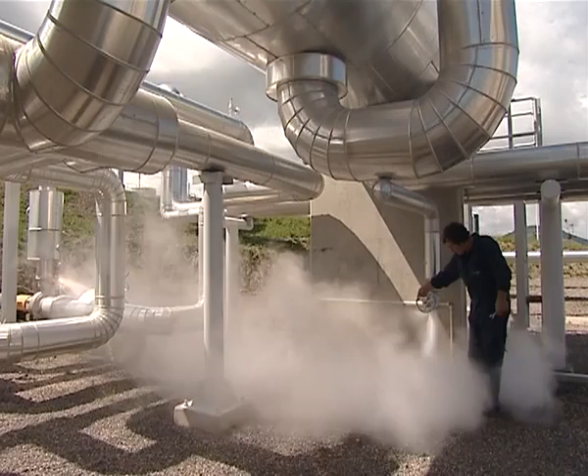This is well CL1, our deepest well with a maximum depth of over 2,000 meters. We collect water and steam from the 5 production wells we have at the Ribeira Grande power plant. The steam at the surface has a temperature of around 155 degrees centigrade, and from the different geothermal production wells, like this one, it is taken to the power plant to produce electricity.

The volcanic nature of the Azores archipelago has created a perfect natural energy reservoir. It sometimes manifests itself on the surface, to the great joy of tourists who can enjoy bathing in hot springs.

The Azores are located in a very particular situation. We are in a triple junction point, which means that three different tectonic plates meet here: the African, the Eurasian, and the American plate. This is the main reason why we have seismic and volcanic activity here, and also why we can find fumaroles and other thermal manifestations of this very high geothermal gradient.

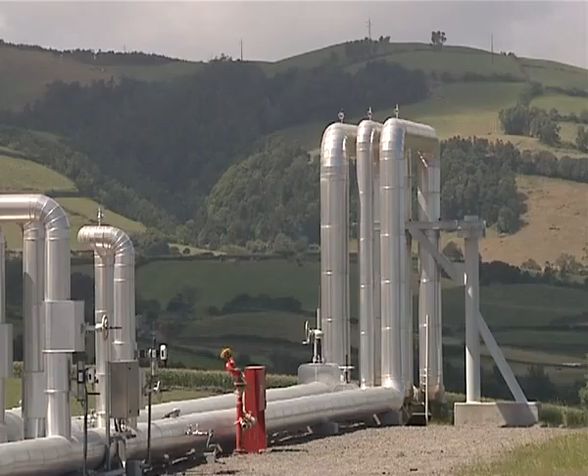As a result, we can see strange pipes in the countryside transporting this natural energy to the geothermal power station. For the Azores, this source of energy represents a truly strategic operation.

The Azores has a great dependence on using oil products. Having this in mind, there was a big need and a strong effort and commitment to develop renewable energies which could be available in the Azores.

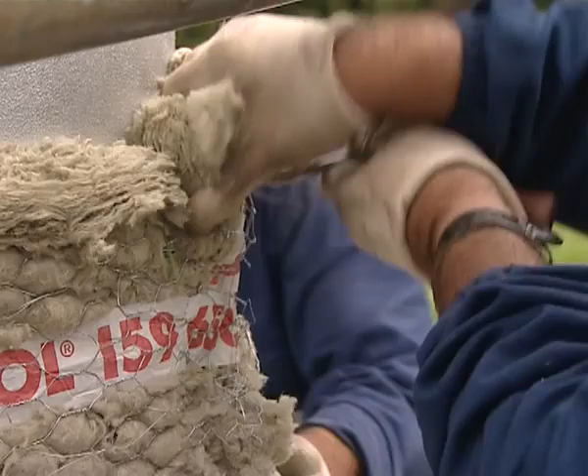In 1980, an experimental power station was successfully built. Thanks to the co-financing of the European Regional Development Fund, the first operational power station was put into use in 1994.

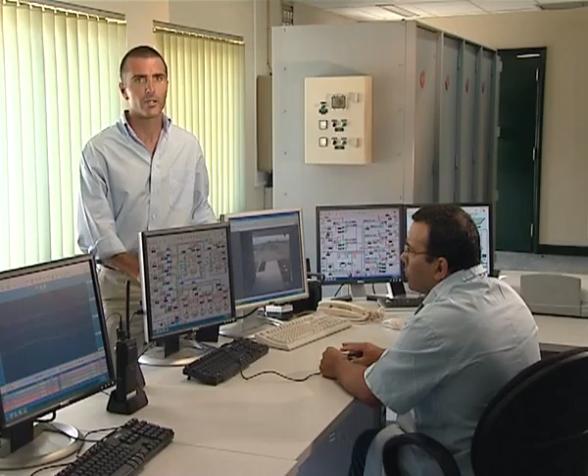We are now at the control room of Ribeira Grande plant. Here we started in 1994, so we have a long history of success using geothermal energy in this plant.

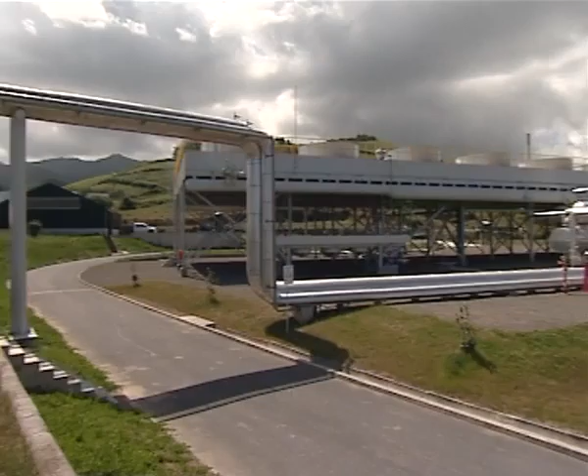This is the reason why we recently started a new project, a new power plant in Pico Vermelho, just 3 kilometers from here. In all, 60 million euros were invested in this project, with 25 million euros financed by the European Union.

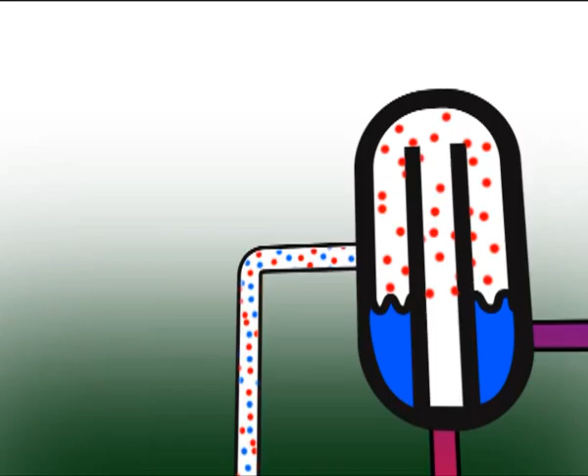The hot water and steam from various wells arrive at the power station by way of a collector. The water is separated from the steam. The heat is then transmitted to a fluid which is used to rotate a turbine. To do this, the fluid is heated by a hot water conduit before reaching its maximum temperature and then vaporizes when it comes into contact with steam.

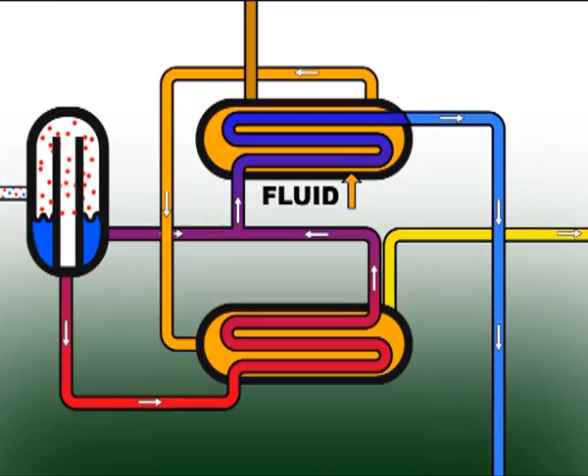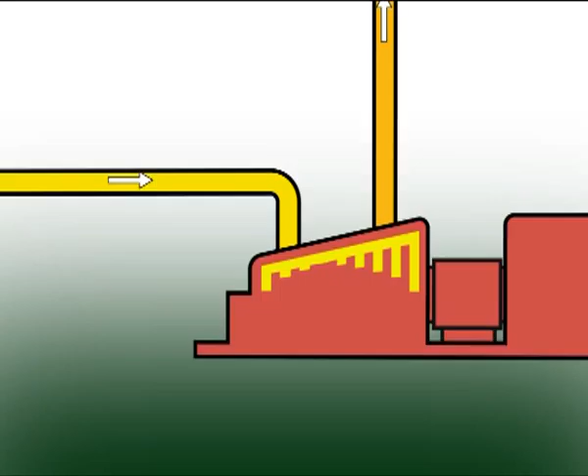The water used is re-injected into the ground while the fluid is sent to the turbine. On heating, the fluid will increase in volume and rotate the turbine, which is connected to an alternator.

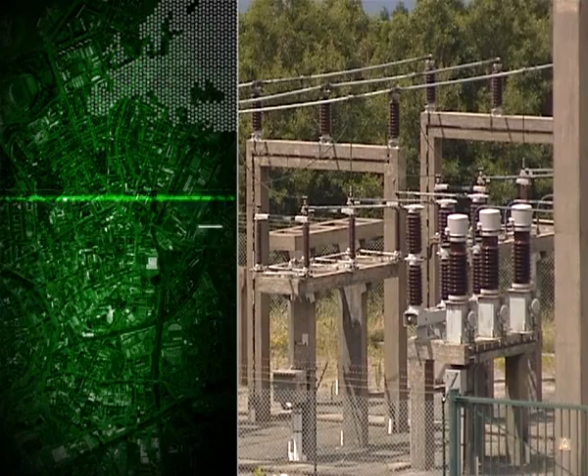We are close to the substation of the Ribeira Grande geothermal power plant. This plant is a 13 megawatt power plant, and together with the Pico Vermelho plant, we are producing 42% of the power consumption in São Miguel Island. The 130,000 inhabitants of São Miguel can now benefit from electricity, almost half of which comes from a renewable source.

The production of both power plants is injected into the grid, and it's distributed by EDA, which is the regional power company. In conjunction with thermal diesel production and also hydro, all this energy is used according to the needs. The thermoelectric power station of São Miguel, which is powered by fuel, is no longer the island's only source of energy.

New geothermal exploitation projects have been underway for some time. The island of Terceira will also be equipped with a geothermal power station. The Azores will therefore gain in energy independence while also having a sustainable development policy.